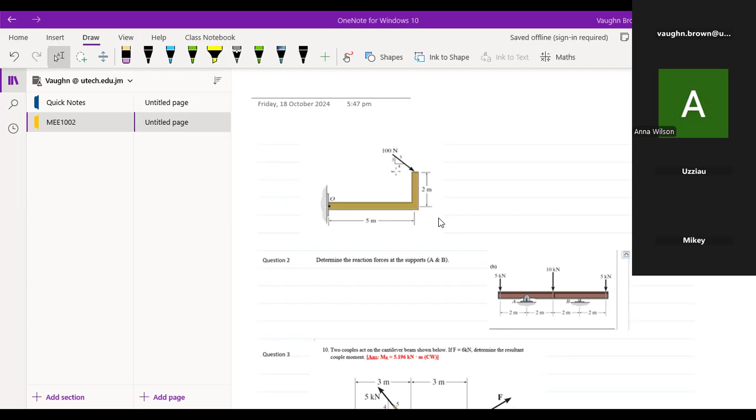So let me just use my pen. All right, so we are typically looking at these figures. I don't think I'll be able to move them, I just have to copy them, because the only other way is to grab them from your original file on this device. Let's see if it's on this device, because I had to switch between laptops. So as a result, I'm doing a little backpedaling here.

So you had some questions from this sheet here, both of them. They would have been from... no, I don't think this one. Not this one, it would have been more from the other one. This one... no, it's not this one. Oh, it's not this unit, sorry. Let me go to the unit.

I want to pull back the question, I want to have them live from the section. I think this is the section, so I'm gonna open both of these and pull the actual question back again, because the fact that I had to switch between devices, I can't move those questions. I can see them, but I can't move them as I want. So let's work with this, we'll put it there, it's a little bit better for that.

So that you can see that properly. Are you guys seeing what I'm doing? Hello? Can somebody talk to me? When I work this one again... Not really, sir. You can see what I'm doing, right? Not really. Hold on, it's paused. Hold on, all right.

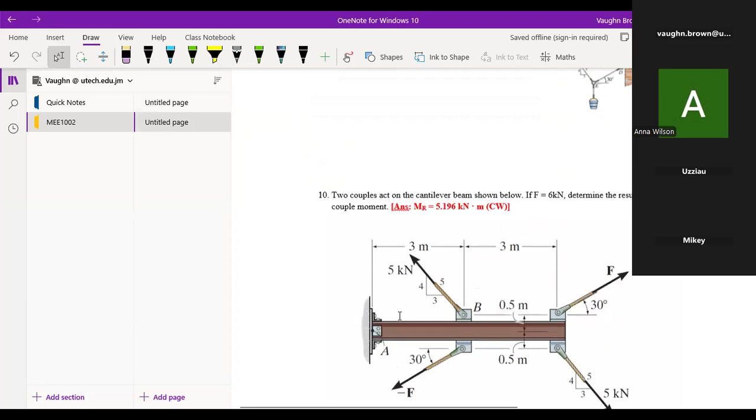I'm just putting back the questions up properly. I have them, but some of them, one or two might be a little bit faded, so I was trying to... all right, let me reshare, make sure that you guys can see.

All right, where am I? I think I'm over here. Don't try to.

Can you see that I'm on a page here in OneNote? Yes, sir, yes sir. Good, yeah, I'm on a page in OneNote. And what I'm doing, I was trying to just bring these up so that you can actually see them properly, because I had to switch devices. So this one here, I can see, but it's faint.

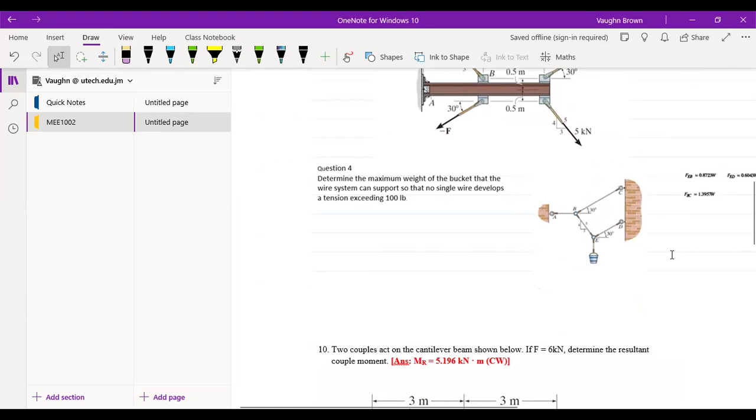That one might be a challenge, I might have to use this as this. Let's copy it and bring it up, I'm gonna carry it down, and then I'll move them around while I'm working. I'll try and create some space.

All right, I might do this one first, all right, and then or this one. I'll do this one last. All right, and I have this other one here, number 2.

That's the order I'd set them up on the other device. But this question I may have to find, I think I have it open, let me see if I can pick it up. I have it open on another... some else.

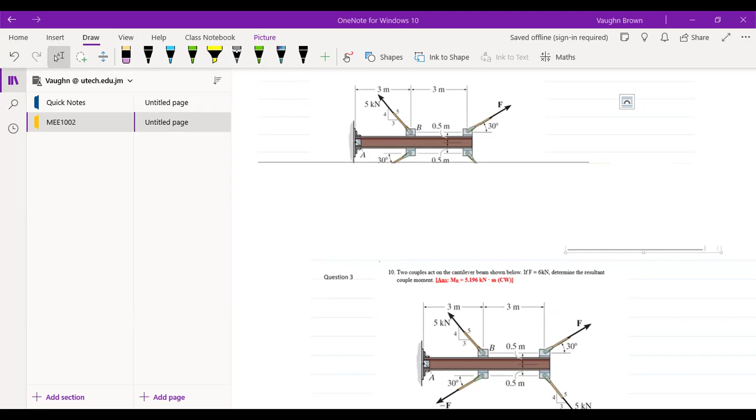All right, are you seeing it? OneNote before I start. So what I'm gonna do, I'm gonna review the unit that you guys would have been given in class. This one here, are you seeing what I'm scrolling here in Word? This is the tutorial sheet. Are you seeing everything? Oh, let me stop sharing.

I'm gonna do it another way, I'm gonna share everything, I'm gonna share everything, so anything that I'm doing, sir, you are seeing it. All right, so I'm all right, I just want to make sure that you're seeing it. So this one, I'm gonna work this one also.

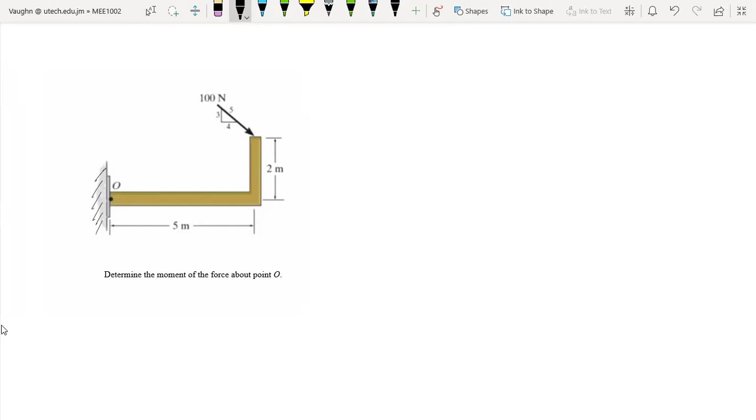So this one says determine the moment of the force. You have a frame, guys, it is pinned there like a piece of metal bolted on a wall. What we have along here is, right there, like a rivet, it's pinned to the wall. They want you to determine the moment of the force about point O. So all of the force here, we're going to just review.

Firstly, when you see the 4, 3, 5 triangle, what it means is this right angle, this is 5, this is 4, this is 3. And they're saying if you notice the direction of the force is down here, so you're going this way. And then you're coming down in the vertical, and then you're going positive - so negative in the vertical, positive in the X.

Now you can do this 2 ways. Some people might be comfortable calling it theta. You call it theta, you could say then that sine theta is equal to 3/5. Why do I know that? Because this angle is pointing to that side. Now this side, down here in the X, is an adjacent side to the angle. One side is adjacent, one side is opposite. So this is opposite. That's all I got.

And then now cos theta would be equals to 4 upon 5.

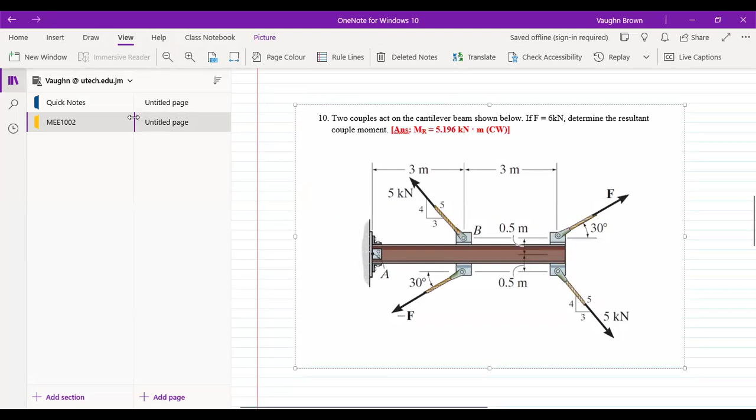So does the line help or is it confusing, which one do you prefer? Sir, everything all right? Okay, all right, fine. I was hoping to have it spread a little wider so I could write it, but it's no sir. When we have a problem with this, sir, we just say to you. Okay, all right, wonderful, beautiful.

So that now is the angles, how you find those ratios. As a result of that, we are able now to look and say let's find the component in the x. So the x component, right, for the 100 force which is acting this way, 100 Newton. It's going to be 100 cos for the x, it is 100 cos theta.

So you could write that now as 100, and the cos theta is what, 4 upon 5. So you put that, and that gives us how much is that now? 160.

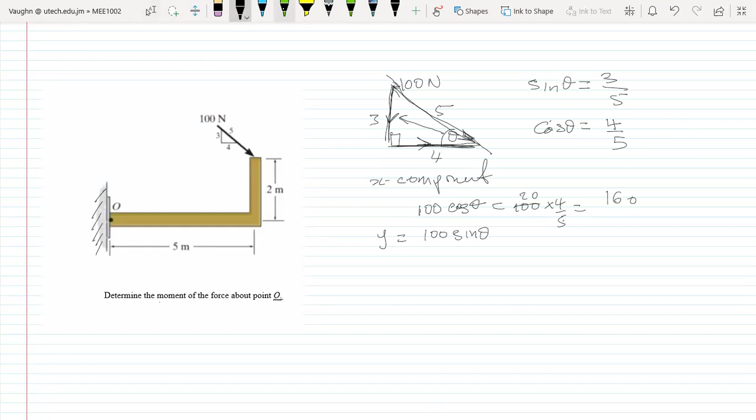What else do we have now? The y component. So the y component is going to be 100 sine theta. And if we could color them, so we have one going that direction, one coming down.

How did he get 160? 5 into 100, how much we got? 20 times 4, is that correct? Shouldn't it be 80? Sorry, yeah, I'm going a little bit fast. Hold on, where's my writer here?

All right, and then the other one works out to be 100 times sine theta, which is 3 upon 5, right? So that now gives you 5 into this, so what is that? 20. So you have 60 there.

Now let's move on. After we have the value for these, let me clean this up. So the value we have for this going that direction, what's the value in the x again? 80 newtons, and this one coming down is 60. And if you notice carefully, I do not write any minus signs there. Why? Hang on, let me get a calculator.

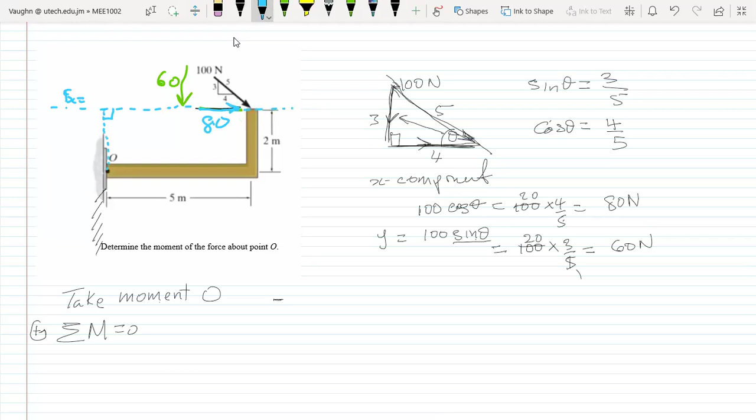And then we have the green, so you can see them differently, I'll write them in color. So for the blue, the force is going that way. Remember, you're going to turn it about this point right here. So if you turn it about that point, the force is running along here - that's the F x component running in that direction.

The distance from where it is turning is 2. So it is going that direction, all the way. Now it's going to cause a turning effect in the clockwise direction, but we're taking anti-clockwise as positive. So therefore, this force is going to be turning 80 times 2, but it is minus. Does everybody agree with that? Who doesn't see that?

Repeat that again, sir. All right, let me write it, it's too bold now, let me reduce the color and go again - just rub it under. So right here, we're going to take the point about here. So this is the distance, the distance from the force, from the point that you're turning.

So the force is what you call a sliding vector, it's going across - or some people call it transmissibility of force. It's a sliding vector, it's going across. This effect is right here, but it is going in that direction. As a result, you turn it about O, so it's coming that way. But it is 2 meters from O - can you clearly see that? So it has a right angle.

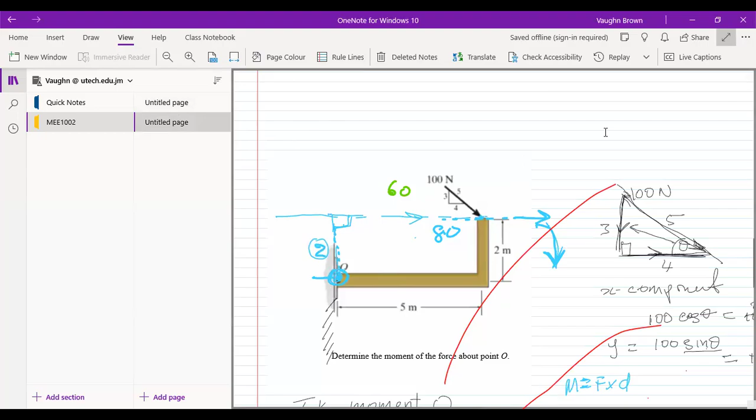So therefore, the force is going along here and it's turning around there. So it's going to be 2 times 80, which is going to be 2 times 80, give you what? 160.

All right, but hold on, we're gonna take it stage by stage. I'm gonna erase the unit beside it because I'm just gonna do the system, just like how I would normally want to work. I'm gonna leave the units out for now and put them in afterwards. So it's times 2. All right, let's clear it up.

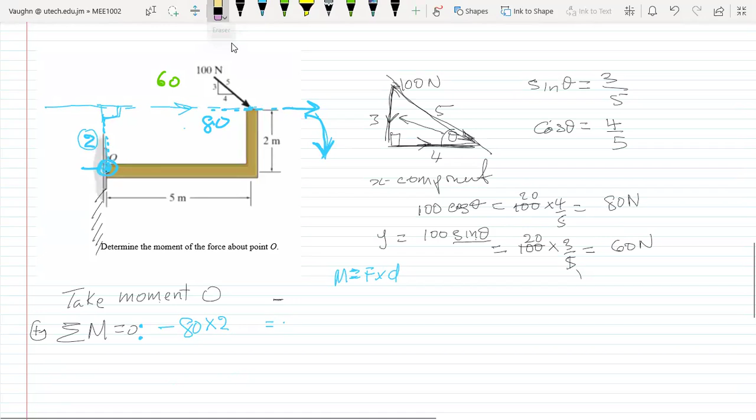All right, so that's for the clockwise turning. Now we're gonna do the anti-clockwise, and I'm gonna use a different color.

Let's use green. So for green, it is coming down. Now, so its effect — remember, essentially these forces are acting right at that tip here, but in terms of analyzing them, we draw them out here just to let you know. So they're essentially right here, and the blue is right here. They are both right here essentially, but we just put them outside there to show you. I could even put the blue up here just to explain where it is acting.

All right, so concentrate on the one that I've drawn for clarity. So we're using green, right? So it's coming through here, coming through here, coming down. You agree with me now? But you see where it's acting through?

Okay, so it's coming through, but you want to take the moment from... let me erase the blue now and use a different color.

I erased all of them. So it's really turning around here for the green. But what is it? What is the moment arm now? So you have force coming down, straight down, and then you have the distance. It is this distance to the force. It makes a right angle right here coming down. Anybody need clarification?

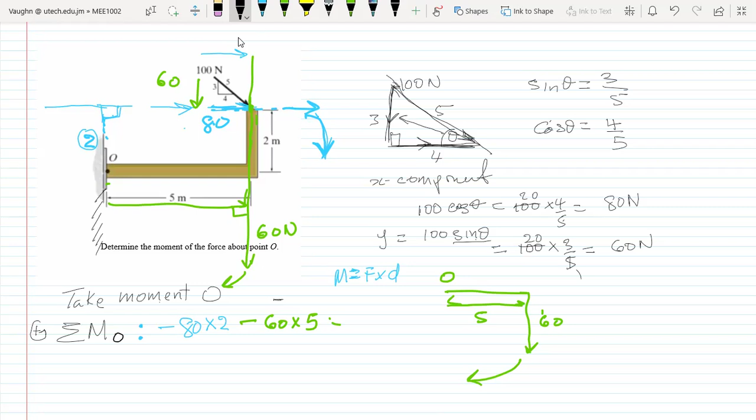Sir, I understand you get a 5 then, sir, if your perpendicular distance, you know, because of O, from O, bro. The perpendicular distance, see the 5 here coming out to where the force is acting. The force is acting from this point here, right here. You get what I'm saying?

Yes, sir. So it's acting clockwise, so this is the force, the distance coming acting across here, this distance here. That is the distance to where the force is. So you have to find, you always look for a distance to where the force is before you take the moment.

So each force, and this is important, because when you go to the next topic that I'm going to do, frames, it's important you know how to take moment. These are basically easy. So we look from where we're taking the moment. What is moment? Force times perpendicular distance.

Let me rewrite this one here. It's force, and we symbolize it, and it must go up. Perpendicular distance, alright, that is a symbol meaning perpendicular distance. So this perfectly maps out the perpendicular arm right here. So you have the distance from O and it forms... based on that, right?

Based on that, you have 5 times 60. Alright, what does that work out to? Let's work it out. So we have it now: 80 times... we have 80 times what, 2? That was the first one. Yeah, 160, plus minus 300, 160 minus 300. And that value gives you, how much is that?

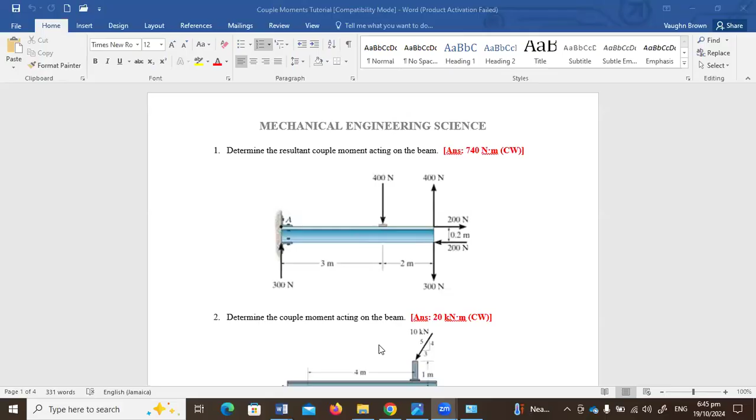Okay, beautiful, ready. Hold on, I need to get rid of it. I'm not seeing it because I'm in like a blackboard mode. Let me see here. Oh, it tells me to keep going. Just indicate to me when... alright. But I'm not seeing my Zoom in there. Right, alright, okay, getting back to OneNote. Where's my OneNote? It disappeared. Am I not still sharing? My OneNote page has gone, where is it? I'm in OneNote. Let's see if I get that page. Alright, so here we're back. Automatically, I'm not taking up and keeping the Zoom, waiting for it to report together.

All right, you'll have to tell me because I'm not going to see them on there. All right, so that's pretty much finished with that part.

All right, so we have taken a moment about O, for that. Once we have worked out the forces correctly, the only way it's incorrect is if we didn't work out the forces correctly. All right, just double check all the calculations that we have done.

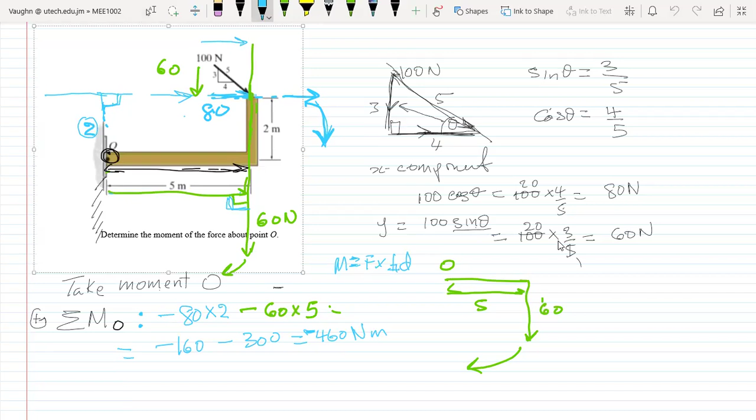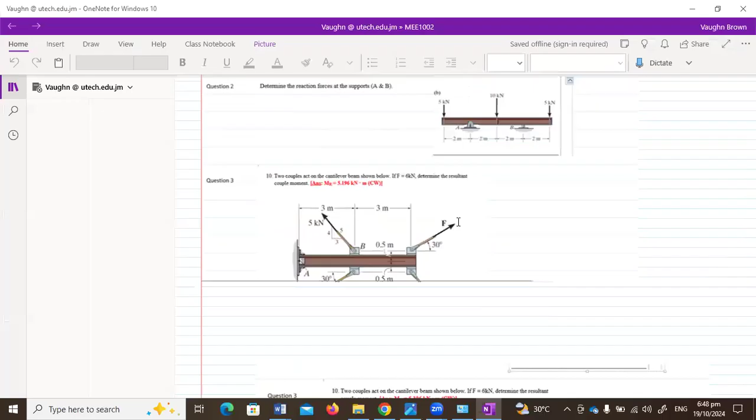Next one, we're gonna come to more. Let's see which one I should do. I'm going to do this one here. I'm gonna look for it because I want to get the right picture of it. That was in the moment file. Let's go into the moment file and take it out. So the moment tutorial, I think it was in this one. You're probably not seeing the page that I'm gonna open.

Look, it was probably a last question. It is, but this question says you're to do the reaction. So we're gonna take some more moments, so you're gonna get a chance to consolidate them.

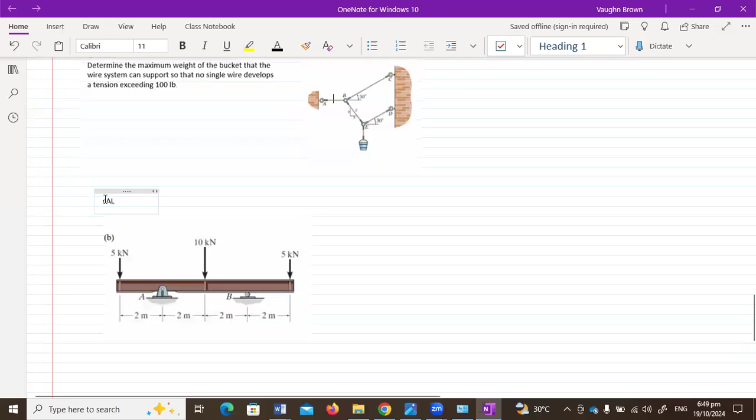All right, so we are to find the reaction at the points where you have your reaction, right? So it says here, calculate... this is what I'm writing. Calculate the reaction at A and B.

Right, okay, so therefore the first thing you must do, class, you must draw your free body diagram. Let me see if I can. The big advantage is now I cannot see my keyboard, I put the zoom up there. All right, so the first thing you need to do is draw your free body diagram. You never ever start without it.

So you do your FBD, let's get the block. You must do your FBD, and your FBD means that you must draw a straight line. That's not the line with a little bit, we need a straight line. All right, good.

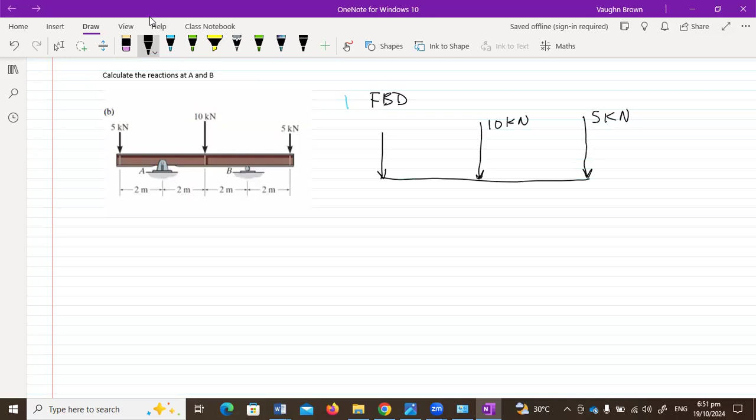We have one here, we have one in the center, somewhere in the center, midspan. We call that midspan, at the midspan of your beam, right in the center, we call it midspan. That midspan is 10 kilonewton, and this is 5 kilonewton, and here is 5 kilonewton.

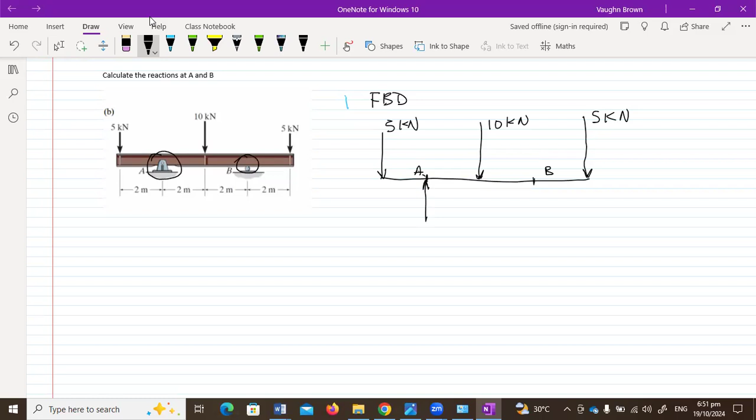All right, now at the middle of this is A, middle of this is B. And remember now, right here is a pin joint. Are you seeing? Here's a roller. So here, when you're doing frames, we'll recognize in frame we'll consider 2 forces here. But for all intent and purpose, what we are doing, we're just gonna do the vertical forces alone. But these examples, just the vertical forces. When you're doing frames, for pin joints, it's going to be a force going that way and one going the other way.

For now, I'm just going to use this one alone for these types of reactions we're finding. That means we're ignoring the horizontal force, so we're concentrating only on the vertical forces. Everybody understand what I'm saying?

Later on, down for these problems, when you see a roller, it means one force at that point. Pin joint, two forces, but that's for later. I'm telling you now because you need to know it.

So right along here is that beam, right? It wants you to do the reactions.

The very first thing we're going to use is the equilibrium equations. Two equations are going to be important here. You have three equilibrium equations, but we're not going to use one of them in this problem. We're only going to use sum of F of y equal to 0, and sum of moments around any point, whether we use A or B. I choose the right way. So I'm going to use these two right now to solve that problem.

So let us start with F of y. The convention I'm going to use is up as positive for the sum of forces, so we write that properly. Positive for vertical y, upwards positive, downwards negative. Use that as a convention. I see in some slides they're switching it around, but don't do that. Stick to one thing until you understand it fully.

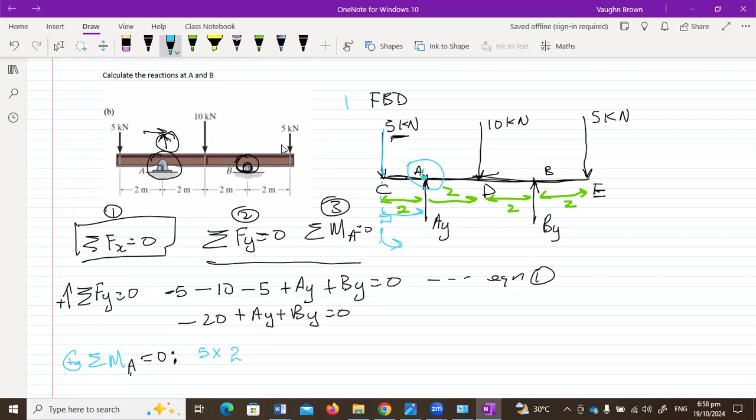Anybody have any problem with that one? All right, let me move this up a little bit more so I can see. So that's the first one. Now, AY is not in the problem because that's where we're taking the moment.

We're going to move to the 10 kilonewton force. The 10 kilonewton force is coming down through here, and its distance from A is what? 2. Can you see that? So it's going to be turning the body in the clockwise direction, which is minus 10 times 2.

Nobody see that? Who doesn't see that? If you're not seeing it and you stay quiet, I can't help you. All right, so we're moving on. Everybody understand? All right, so moving on.

Excuse me, I was having problems turning on my mic. But why is it 10 times 2 and not 4? Because you're taking it from A. What's the distance from A to where that force is? 2. Yes. But isn't it like you completely ignore the fact that A was there and just take it? No, we are taking it about A.

Remember, look at what I write over here. We write out what we're taking the moment about, because you need to tell me that when you're taking a moment, you need to indicate what you're doing. So I write out what it is that I am doing so you can understand. You see that in green? That is what I do. That tells me where I'm taking my moment, so I can understand. So from that notation, you should understand that you're taking the moment about that point.

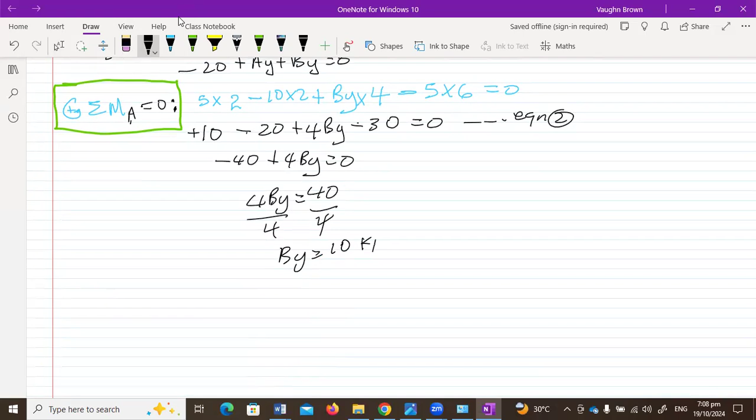Can you see that this zoom link is shadowing me? Can't see, we're here. Yeah, go back down now, sir. Let me screenshot the last part.

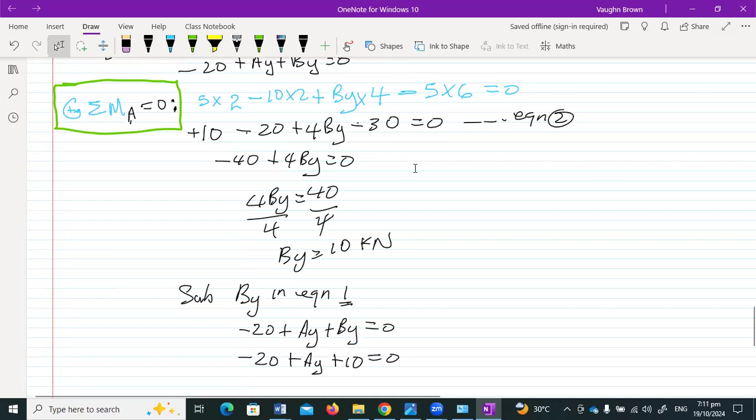0. And you're just simply going to transpose. So it's going to be ay, and it equals to, this becomes minus 10, this comes over as plus 20. So that value, only 10. Right? So you see that comes over as minus.

Remember, you were taught the simple equations. You didn't know you were going to use them, eh? So you're using them now. Because students normally challenge me a lot about stuff that I teach them that they never use. But see, you use stuff from basics. So we're scaffolding you by just the theory right here. Right? So you're using it to transform you from one level to the other. Scaffold you. All right, all right.

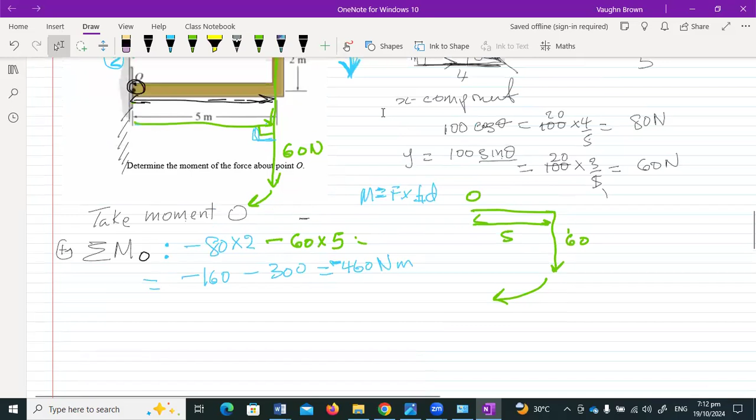So let's move on right there. So that's, you have the solution. So that's 2 problems that we have done. We have 2 more to go. I am going to take this problem here first.

I don't have a bigger picture of it. I'd have to go and search for it. I don't have the time for it. No, I'm just gonna expand this one. Let's put it somewhere here. Let's see if I can expand it. It's looking shady, I hope I can read the value.

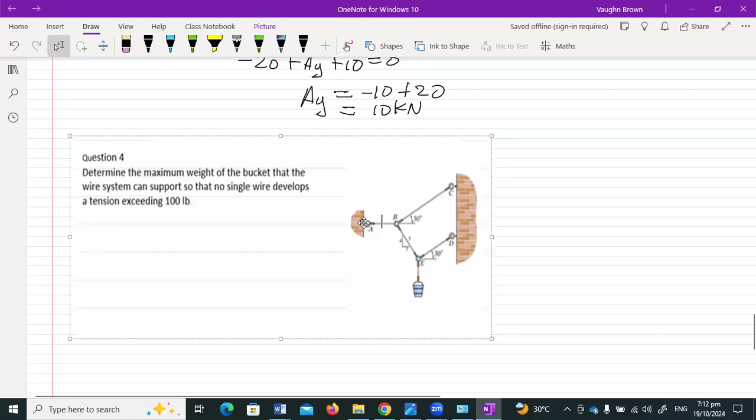All right, I've changed the value a little bit from the one that I have on the test. Why? Because just in case I have to open up the test, you know, I changed the value. So I'm using 100 pound. The one you have is 50.

All right, so here now you have a problem. It says A, B, C, and you have D, E. Now, the first thing you need to do, and this comes from the equilibrium section that we have done for forces, right? So the first thing you need to do, you need to draw your FBD. What is your FBD, please? Can somebody tell me?

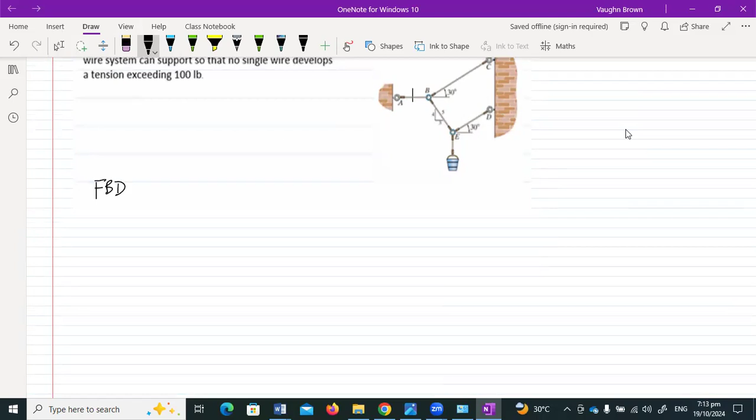What is your FBD? Free body diagram, sir. Right, free body diagram. So you're gonna draw your free body diagram. So we're gonna come and we're gonna go that way, I hope I draw it right. And then it comes down that. So we're gonna draw my FBD and label it, so we know what we're doing. So this is D, and I'm taking off the section with E first.

So I'm gonna resolve forces about E. And this point would have been B, right? And then, so I'm gonna consider that my force is here, my force is going that way. So you could choose to call it whatever you want to call it. Some people probably call it TBE or EB, since it is going up, we could call it that here. We could label it TEB. Now this one could be called TED, right?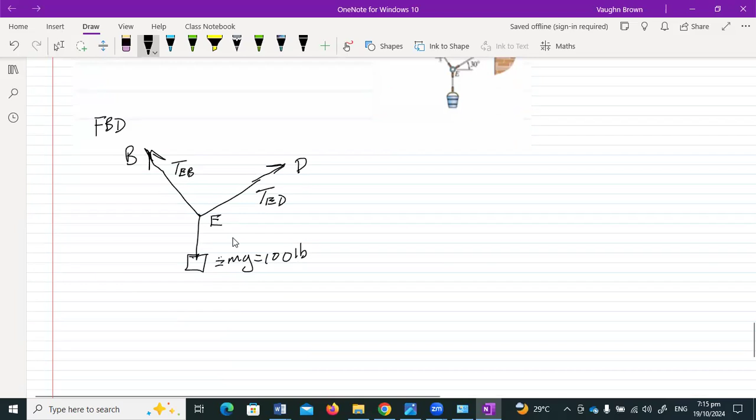It says determine the maximum weight of the bucket that the wire system can support so that no single wire develops a tension exceeding that. So that's what it is. All right, what are the angles now? Let's put those in because those are crucial. We haven't done that.

So we are solving the tension in TEB and TED. We already know this one. This one is 100 going down.

We need to draw where the horizontal is, and where the vertical is coming from. So this is your Y, this is your X. So what have they given you? They said that this is 30, and they tell you that this is a 3-4-5 triangle over here. So this is 4, 3, 5.

What are those angles? Same thing like we did before. If you want to call it alpha, this is 4, this is 3, this is 5. Sine alpha is going to be 4 over 5. I'm calling it alpha, and it equals 4/5. All right, so we have those. We're just going to work with the ratios.

We could work out the angles too, you know guys. I know one is 30 something and one is 53 something, but we could choose to work out the angle here and use the angle if you want to do it that way, let me show you. Find one of them for me, any one of them is going to be the same value. So sine of, let me just show you the two ways.

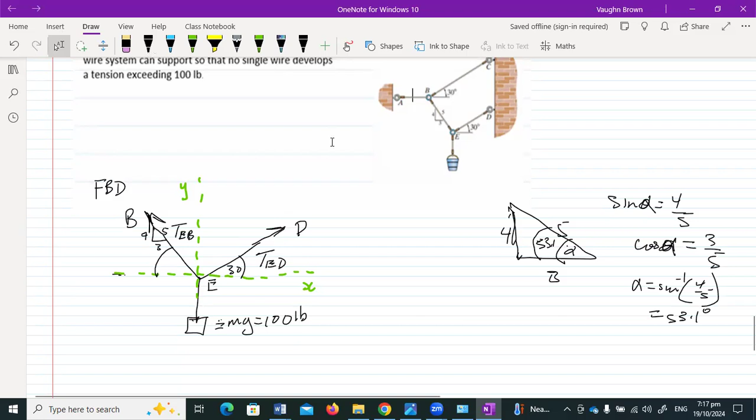Sir, why didn't we use the weight in the 3-4-5 triangle? You can't use the weight in the 3-4-5 triangle. It's only giving you a direction for the tension in TEB, that's all it's doing. Okay, all right sir, yeah man. All it's doing is giving you that. So therefore, we know that this angle is 53.

For those persons who are not comfortable using the ratio, I'm just showing you two ways. So now that I have the angle, I can just work with the angle straight. All right, so I have angle over here, angle over there. If you're comfortable with that, do that.

All right, so let's write them now. Sum up the forces in the y equal to 0, and you're taking y as positive going up. All right, so if you look for your forces in your y, what are the components you have?

A component going up in that way, all right, and you have one, so one coming this way, let's do it in blue. Two of them, one coming that way and one going up that way, can you see that? One going that way and one going there. Likewise, over here, one coming that way and one going that way.

All right, so we need to identify the horizontal and vertical component, but we're gonna do the horizontal one time. So let's write them, I'm gonna write it in black. So for the vertical components, it's going to be for the TEB, so it's T E B, and the force going up is what? Sine theta, right? So we know the value of theta, let's put it in. So it's sine of, what's the value there? 53.1, and it's positive. Do you agree with that? That's for the Y, oh that's the one in blue.

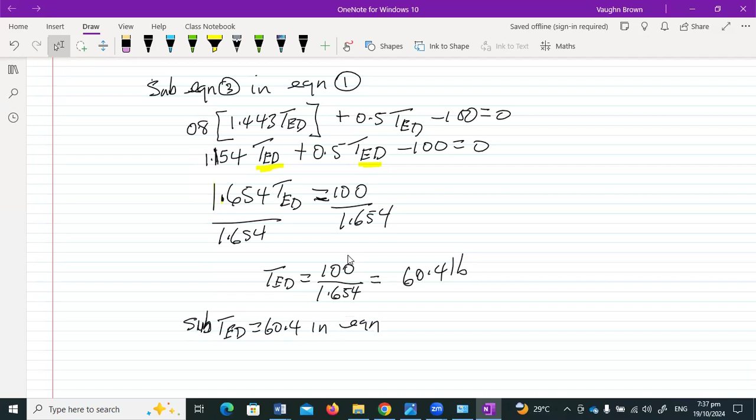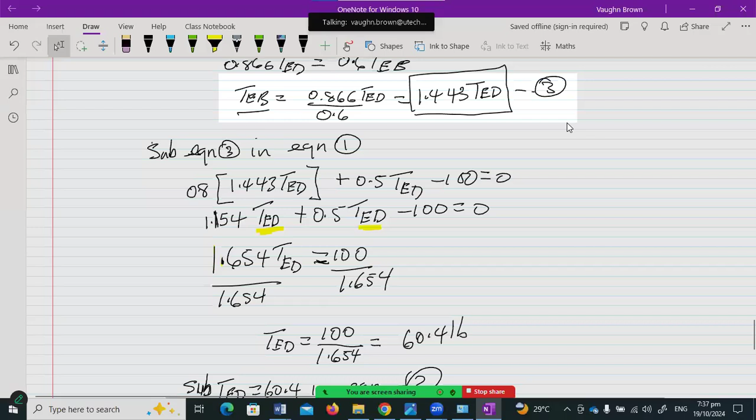So I put that in. Now that you have the 60 pound, you can substitute. You're going to substitute TED equal to 60.4 back into equation 3, because remember, you formulated equation 3. So equation 3 said... let me copy this down. When I bring equation 3 down, this is a good way to do it. So here we have it, that's equation 3, and we're going to substitute TED in.

It's simplified, and TEB is equal to 1.443 TED. So in that case, TEB is equal to 1.443 times, and you drop that in, which is 60.4. So what that gives you, multiply that by 1.443. Guys, you can help me work here, it'll smooth out the process so I don't have to go to the calculator every time. I'll take your answer if I can hear 2 or 3 people telling me the answer.

87.17. 87.22, I got, because I'm using some decimal points. How much did you get? I'm using extra decimal points to make sure the answer is more accurate. Sir, I got 87.15. No, 87.16, maybe you didn't use extra decimal points. So that's why my answer is that.

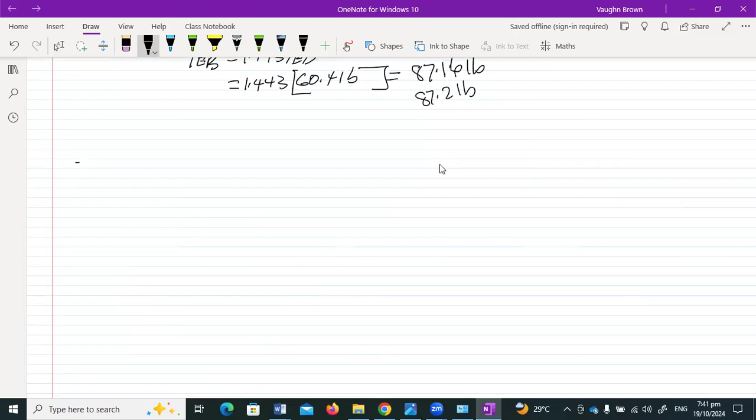The next part is we're going to go again. So we have done that section. We need to do, let's bring this down. We're going to pop it down. Let's bring it down. Sir, before we move on, right?

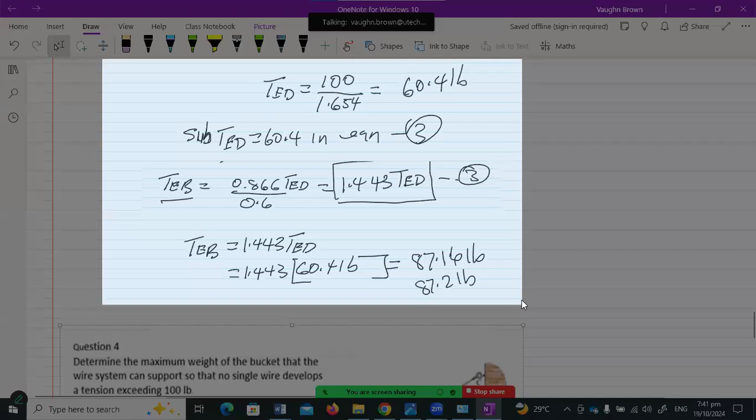I understand everything, right, but you drew the free body diagram, you don't understand the free body diagram? No, I understood everything you did, but the free body diagram that you did only has TEB and TED, right? What about the other rope at the top, the string at the top there? Why do we ignore that? Which rope, BC? We're taking it phase by phase, we're not ignoring them, we're just taking phase 1, phase 2. Cool, so part 2 now.

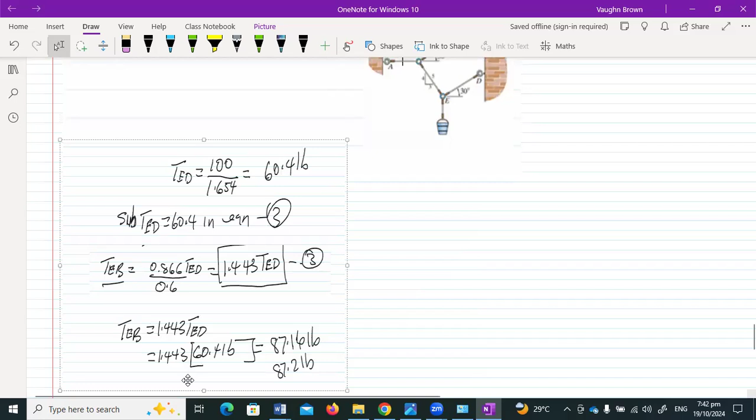I brought the solution here. Probably I should make it a little bit smaller because it's in my way. Hang on, I'm trying to... so this is my favorite page to work with. Over the years I've used this page, and I find it very useful, so I don't bother with anything else.

All right, so now we need to draw back a free body. We saw part 2 of the problem, and then we need to go and draw a free body diagram again for part 2.

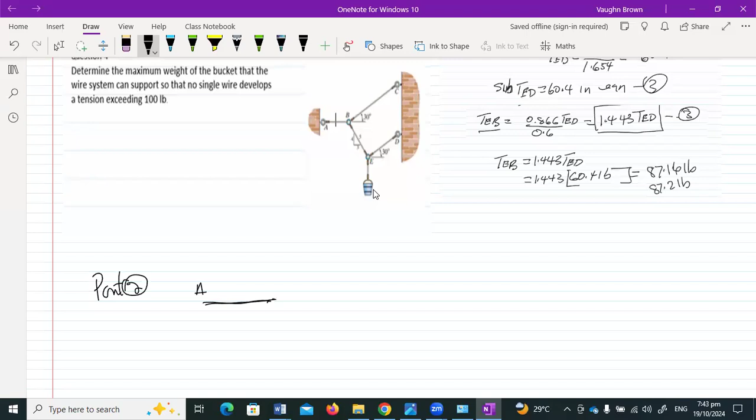So here we go. So we have a part goes straight, right? This is A, this is B. Then we have another part goes up to C, and then you have another one going up, right here.

Some person's internet seems to be very unstable.

All right, so this part was what? E, right? Now the fact of the matter is we worked out some already. We have that already, and we have that.

So we have pretty much some angles here. We had worked out some already. We know that this is, let's put them in. That's 30. We had worked out EB. You remember we had worked out EB? What was EB? Let's show it up here.

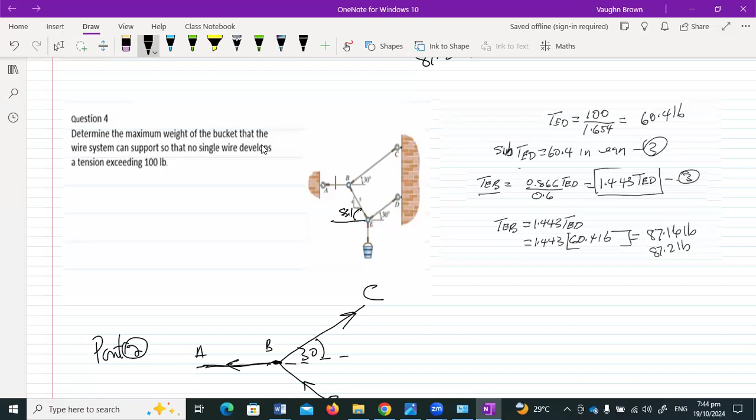EB was 53.1 down here. Let's draw it in where it was. So right along here, down here was, this angle was 53.1. Everybody remember that? That's important to me. So I have this angle down here.

I'm putting them in the direction that I have them labeled. And this is T, B, A. So it's any direction I choose the force going, that's the direction. This is the rigid body. That's the direction that I'm putting it, and labeling as consistent as possible.

And this is important, so therefore this angle here is 53. I'm writing a different color for clarity. This angle here is also 53.1, right here, to the horizontal.

Can you see that? So right here now you can see how alternate angle comes in. Is that diagram too small? You want it bigger? Let me make it a little bit bigger. I'll have to do some adjustments. Let's get it a little bit bigger.

All right, so here's the angle there. That angle is 53. So this is T, E, B, right? And the arrow is going up. All right, so there we have it.

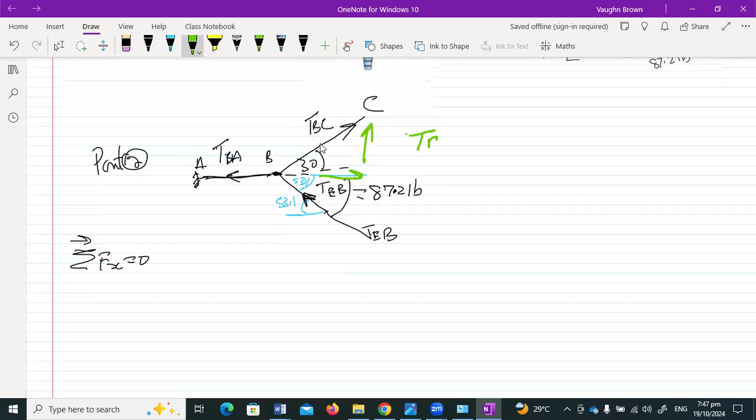All right, the first thing we need to do is reckon what's our component of our forces. So we have for TBC, we have some forces here. So this is T, the first one is TBC for the vertical, sine 30, that's what I'm going to. The horizontal one, so that is our Y component. For the X it's going to be TBC cos 30. And you notice I'm not putting any sign, I'm just telling you what they are. All right, so that is important.

And we already know TEB, we can find that one. You have one coming down. Let's write those so we can just work with them smoothly. We have one coming down, and we also have one going that way. Let me do it with a different color.

Sir, when you say work it out in phases, you mean just choose two strings at a time and then?

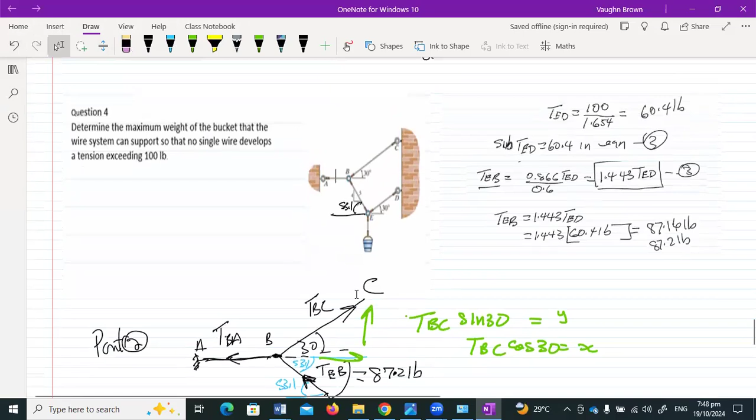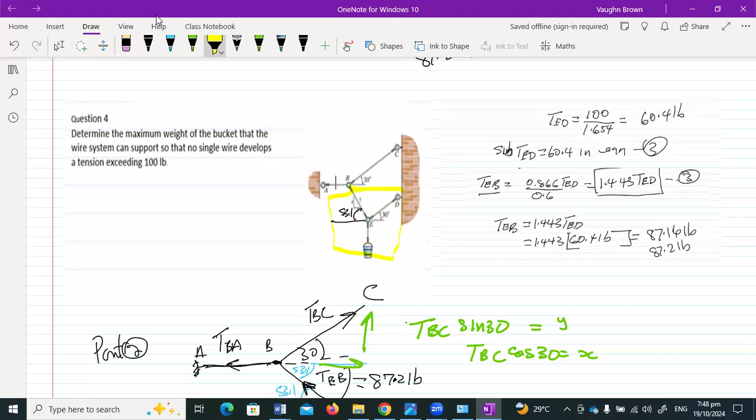Well, it's three. Let me go back again. Let's scroll up onto it. When you say in phases, all I'm saying is we're gonna take one segment and work it first. And then when you finish, you know that the BE string is going to be interlocking to the second phase with a value. It's going to interlock there, so you have to consider it. So yeah, you're taking a section first, and then you're doing the very same thing.

So let's find the component of EB again. One is coming down, and one is going that way. So they are both negative components. Let's find them, let's write them now. So one is TEB for the X, is going to be what? Cos 53.1.

For the Y, TEB sine 53.1. Those are the components that we are working with. All right, so again.

Sir, for TEB you put the force up, but then you're saying it's going down and left. What is still going down and left? What did we assume up here? What did we assume when we're doing this part? Did we assume that it's going up here? We keep the same assumption. The force is going up. Whatever assumption you made in the last part, you have to keep it.

But sir, you're saying down the bottom that it's going down now. Did I change the position? Yes sir, he's right, he's right. That TEB here in this equation is going down.

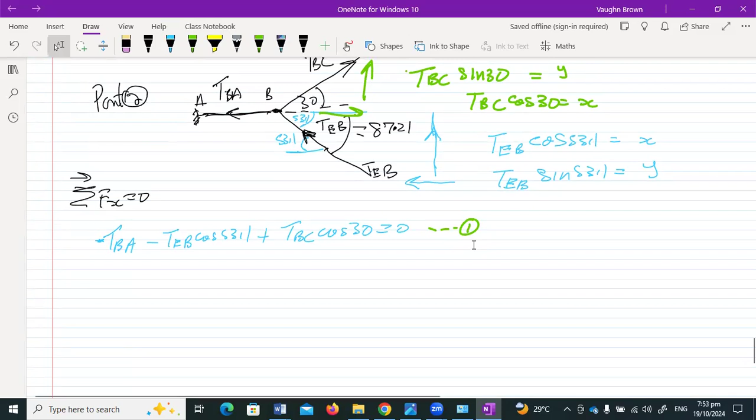And then equation 2 now. Let's write equation 2, let's bring that down a little bit more so you can all see. I'm gonna write it in green - all right, I hope you can see it. I prefer black, but because I want to kind of... all right, I'm gonna write it black, I like it, black is better, probably hurting your eyes otherwise.

So therefore we're gonna do equation 2 now, and we're gonna sum all of the forces in the y equal to 0. All right, so let's start. So we have one going, this TBC sine 30. All right, and we have another one going up, which is going to be plus TEB.

What did I tell you happens? That's sine again. Sine 53.1. Am I correct here? Let me just check that. Yeah, so that's a sine. All right, everybody see those forces?

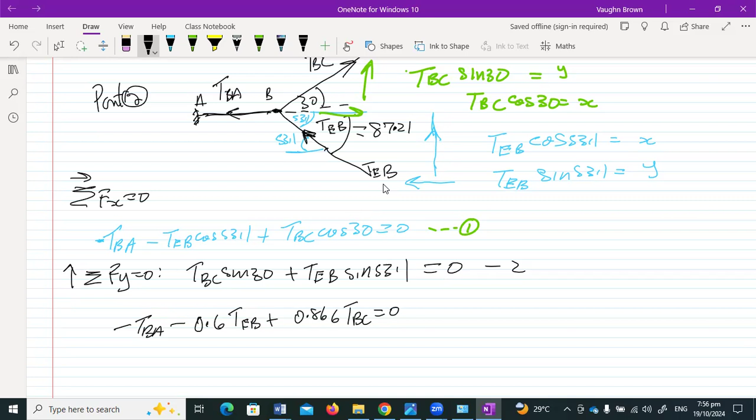All right, I'm not going to the calculator, you guys gonna do it. So we have 3 unknowns in equation 1, you recognize that? So simplifying equation 1. This is EQ1 and this is EQ2. All right, next one, so we're gonna work with equation 2.

Let's simplify this. So equation 2 now simplifies to 0.5 TBC plus sine 53.1. How much is that? Sine 53.1 is 0.79. Have any more decimal points? Well it's basically 0.8 actually if you round it properly.

Because that's sine 53.1, yes sir, it's actually 0.8 if you round it all. Right, 0.8, let's call it 0.8. Where's my writers? Come.

And this is TEB equal to 0. So now this is equation 2, of course. This is 1 or 2? This is 2, so this is equation 2. Now we're going to write equation 3 because we're going to transpose one of the equations for the other.

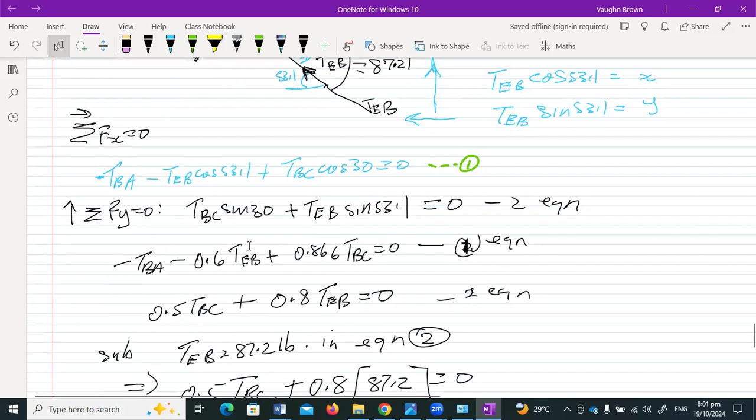All right, and then you're just going to simply now, so you have two of the unknowns, so you're just going to drop it in and find the last one. So you're going to substitute. So here you go, you're going to substitute TBC minus 139.5 pounds and TEB 87.2 pounds in equation 1. All right, so let's bring equation 1 down.

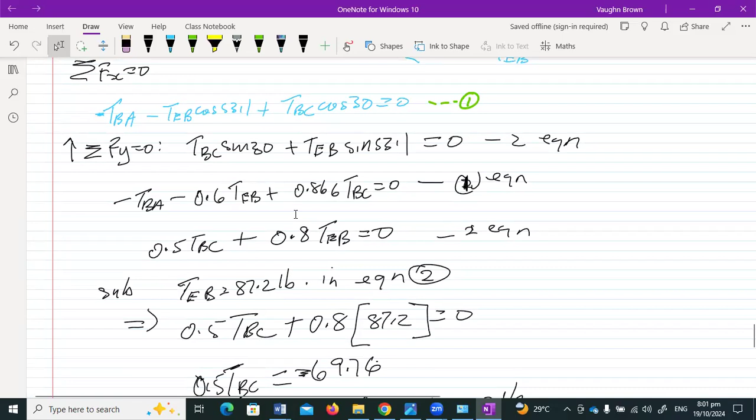All right, I'm just gonna bring them down for simplicity. Let's drop it, I'm gonna bring them, drop them right here. So we have our expression right here. Good, so we're just gonna substitute.

So the only thing that we don't know is TBA. Minus TBA minus 0.6 times TEB, 87.2, plus 0.866 minus 139.5 equal to 0. All right, so we need to just solve for TBA.

Not true, so can somebody multiply out this summing? 0.6 times 87.2. 52.32. All right, plus next one.

This one is gonna be a minus though, let me just correct that. 0.866 times that value. Sir, it's 120.807.

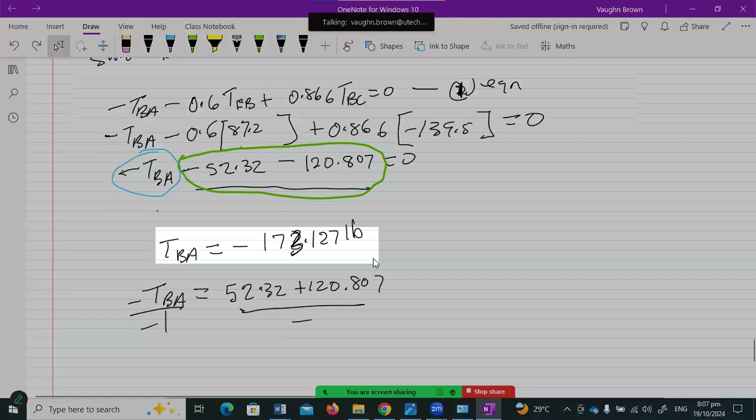Oh, it didn't move it. I want it to move it. Come on, let me know. I'm gonna take a 5 minute break because we have one more question to do. I want it to move it. Is it giving me an option? No, not giving me an option. I can copy it, there's a copy, but it's not moving. I can erase it.

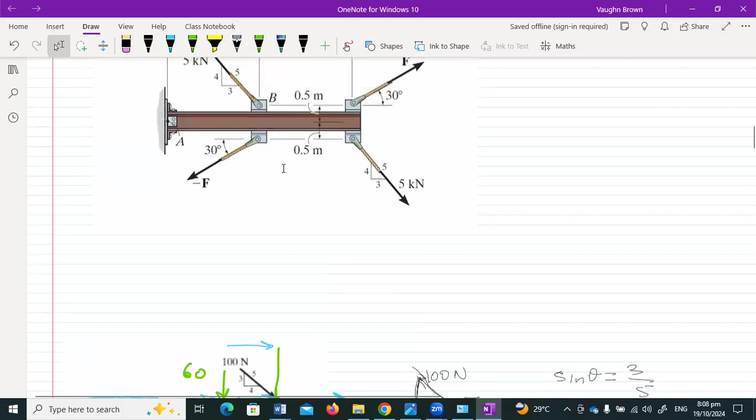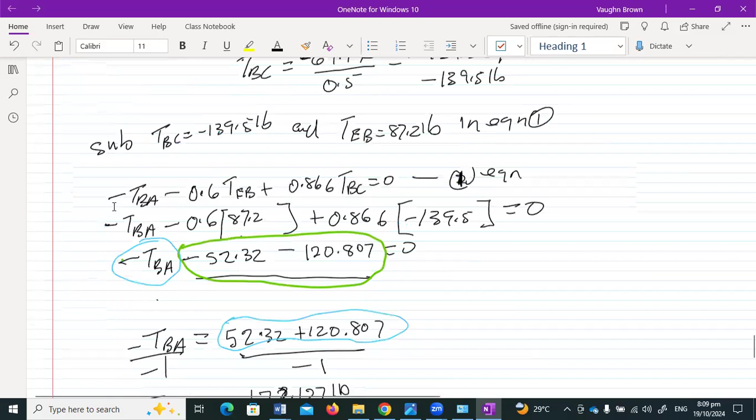So I've done those, and then we are doing this guy. I have this guy to do. I'm gonna take this guy down the bottom here, cutting, dropping all the way down. This is the one that we're doing. You guys can start working.

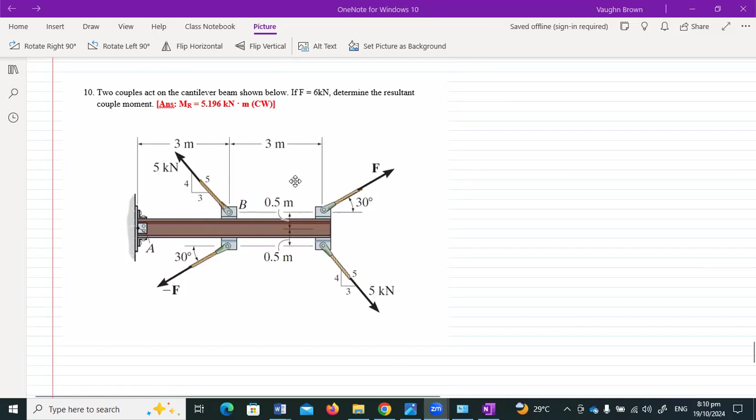So this is the last problem. All we need to do, everybody, work out the components first, so when I come back, you can easily tell me how to solve this problem. It says two couples act on the cantilever beam shown. If F is equal to 6, determine the resultant couple. There is also a resultant couple here, so both of them, resultant couple. What I suggest, work them out into components first and just get the resultant couple.

So this is not hard, we just need to do two sides. We know F is equal to 6 already, and then 1 is 5. So this is not hard, we should finish within 15 minutes. 2 steps and we finish this problem.

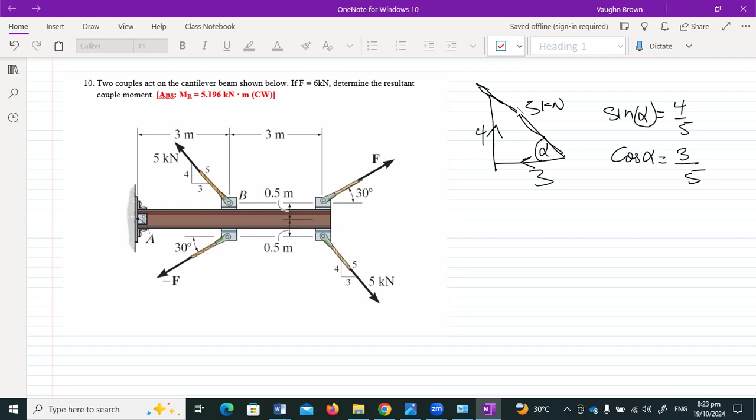But let's work it out for clarity. So sine alpha equals 4 over 5, and the angle, and cos alpha equals 3 over 5. So that's what we know. You could choose to work out the angle, or just use the ratio. It's easier to use the ratio. But let us do it the long way, so we know that.

For a couple, all you need to know is one, the distance between the two forces. So let's draw this. One is going up, in green, positive, and one is going negative for that one. But for this one, let's look for that. The other one in blue is coming, one is coming down, and one is coming that way. Do you agree with that?

That's for that one. For the other one, F, which equals 6 kilonewtons, one is going up, right? Let's take that out in a different color. So this is 6 kilonewton, one is going that way, one is going out, right? Same thing with this one. But remember, you don't have to do both forces.

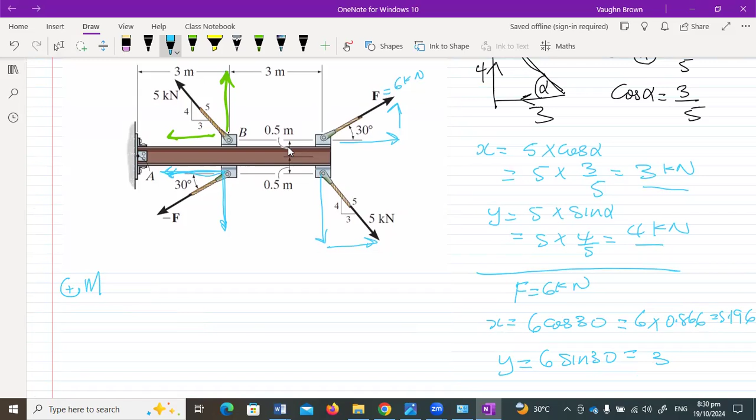So you have, if you notice, before we start analyzing it, there's two 5 kN forces. And remember, the coupling between it will be equal to the distance between the two forces.

So the distance between the 5 kilo vertical components is what? That's 3. So if you notice, let me see if I can illuminate it. This is 3. Between these points is 3. Do you agree with that? Between this point and here is 3. All right, that's the force we're concentrating on.

And then for the other one, can I get a different color? You're getting the distance between this one and here. The distance is 1. The distance here is between here and that distance there. It's 1 between them. Whatever component you have here and the component you have, the distance between them is 1. Let's go about that part.

So the distance between the components for the vertical ones is here, so it's components here. So let's do them.

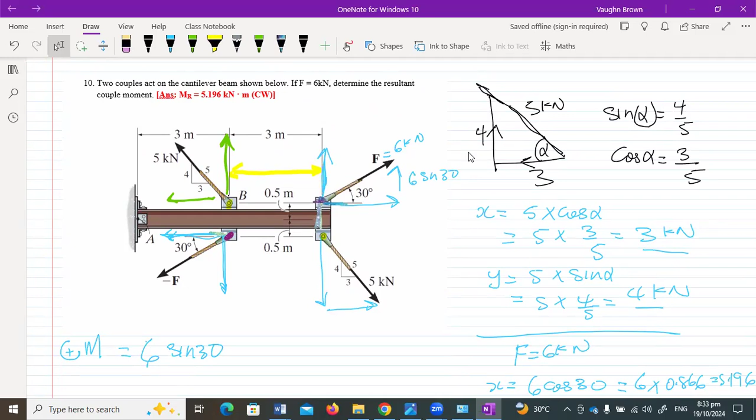And the vertical component down here is this, can you see the point? It's between these 2 points here. So it's 6. And we're taking which direction? Which direction is the body moving? So is it the distance between both of them?

One going down, one going up. What's the distance between them? 1 meter, sir. No, man, I'm talking about the vertical component of F. What's the distance between the vertical component of it? 3.

Right, so the distance between the vertical component of it is 3. And it's going to be turning the body which direction? Anti-clockwise. So therefore it is 3 and it is positive. Do you agree with that? So between this component in blue, the vertical component I marked before, this one coming down and that one going up, the distance between them is this. So that's the first one, am I right?

All right, the next one now, I am going to look at the horizontal component for that force. The horizontal component, where are they? They are in blue still.

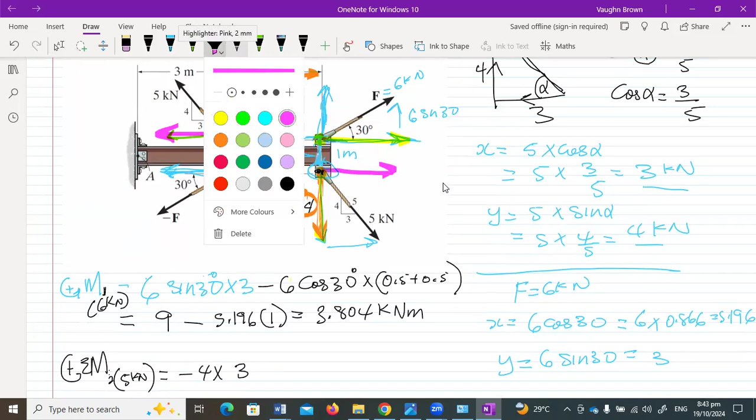All right, so what's the distance? Let me highlight the distance a bit. So the distance we're talking about is this distance. Right here. This distance here and that distance right here.

The distance is going to be 1. Do you see that? Can you see that the distance between the components is 1? Yes, sir. All right.

So therefore, if you take it from any one of them, any other point, suppose you want to choose this one that I'm marking right here, and you take the force on the other one. So if you consider the one below, let's say you're taking the point about where it's anchored for the other force.

So the other force is going to be turning the body clockwise. Do you agree? This one is going to turn the body this way. You agree? So that force about 1, and the gap between them is 1. You agree? So the moment arm here is 1.

And this is the force. So the force comes tapping and coming through this point, and it's turning about this point here. And it's turning about that point, and you're turning the one up top here about that point. So it will give you what now?

So what was that force value again? Can somebody remind me what that was? The horizontal one was 5.196. 5.196 times 1. So it's 5.196 times 1.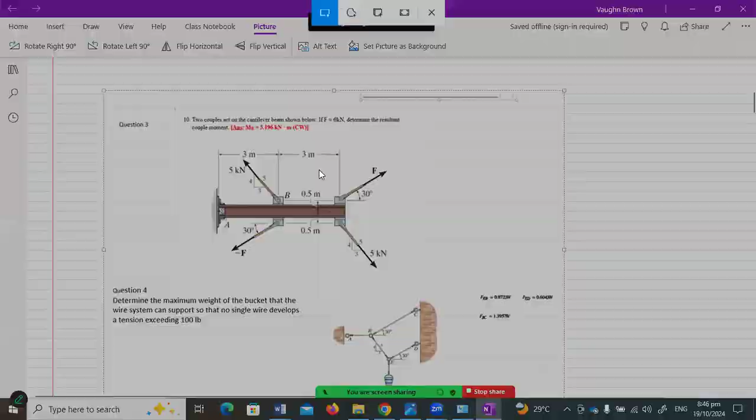But once you see you have two forces, let me see, can I pick up the original diagram? I don't want to mess with that. Did I copy it or leave it somewhere? I took it, yeah, the one here. So everything is in. I'm going to take off part of this. Let's see if I can use it. All right, so let's come back down.

Let's talk about it a little bit. We're almost done. I think one more little skill to go, but I want to just explain something. All right, so bring back this picture. It might not look pretty good here, but I'm going to want to put it here because I don't want to finish up.

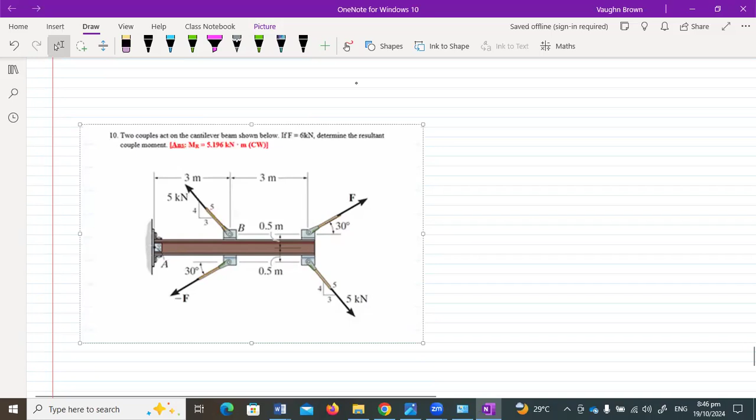All right, so what we're doing, if I could mark up this one, nice right over here. Feel back the same color. Really funny. All right, so we have the components going this way. What is this one? Force. That is 4 kilo.

And we have a component going that way for that, same 4 kilonewton. All right, the distance between this point and that point, sir, the horizontal one was 3 kilonewtons, not 4. Ah, thank you. Beautiful, beautiful.

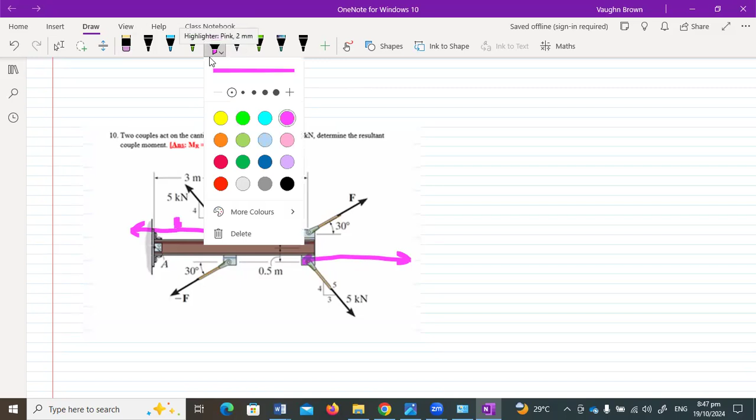Yeah, I'm tired now. You guys give me a lot of work to do. Not necessarily you guys, or it's not going to write at all. It's still fine. Let me take up one from here. I think.

Can I get a pink? Get a pink, right. So it's 3. Oh, black. I could have sworn that I changed the color. It didn't change. No, I could change that. So this is 3, it don't change. All right, guys, it won't change. Let me just erase this out. Try my best, but it's not.

So what we're saying, this is 3 kilonewtons there. There's a 3 kilonewtons there. And this is the distance right between them. Right? Let me look, that's the distance. That's 1 for them. You understand me? But that is the horizontal one.

What we do, though, when you take in the couple, right? When you take in the couple, you have to take it against one of them. It's either you're going to use B, or if I call this one C, either you put B as your center or C as your center. If I use C here as my center, I'm putting my compass point right here. Therefore, the turning effect of the x component is coming. Remember, the x component is coming along here, see there, and it comes right out here.

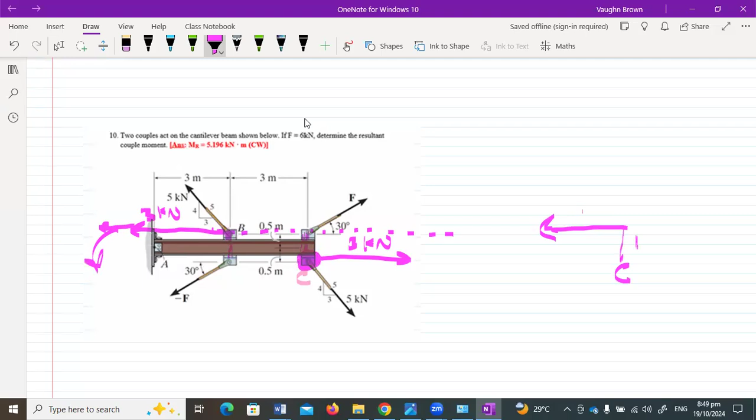C is here. Sir, wouldn't it be anti-clockwise? Pardon me? Wouldn't it be anti-clockwise? Anti-clockwise, I said. What did I say? Clockwise? Anti-clockwise. Yes, sir. Yeah, sorry. Okay, so this is 3, right? So it turns it, so that makes the right angle.

So you have to look at where the two forces are anchored and the distance that separates them. For the component that is horizontal, it's the 1 that separates the horizontal component. I would do it also for the vertical component. We do the same thing.

For the 5, we look at the one coming up, which is what, 4. And we look at the one coming down. If you choose to hold C again as your turning point, let's say C is the turning point, therefore the distance between C and where that force lies is going to be 3 for the horizontal distance. So if you hold here as your turning point, then this force is going to turn the body around here, that point. So it's going to be 4 times 3.

And that is going to be what? Clockwise. You understand now? And you do that for each one of the forces. So you do it for the F and you do it for the 5 kilo. The F, of course, is 6 kilo, which you know. So you do it for the 6 kilo and you do it separately for each component.

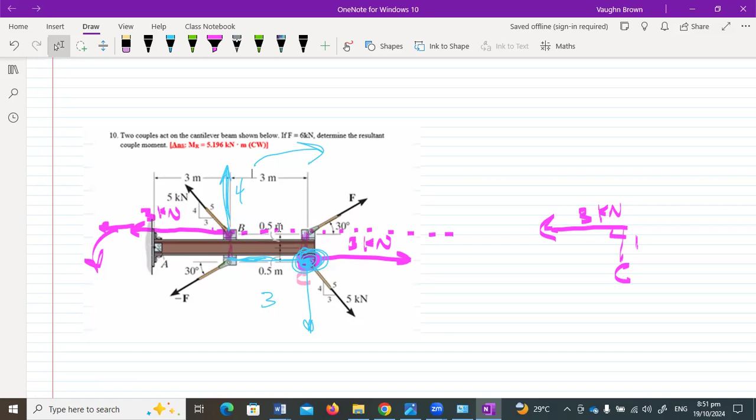You analyze them between where they are. All right? Does that explain it? Does it explain it? Was that helpful? Yes, sir. All right, yes sir. So let's go back. So this one works out to minus 12, of course, plus 3 equals to minus 9. Was it? Yeah, it was kilonewton meter.

All right, but the problem is not finished. The problem says we're to find the determine the resultant couple moment. So the resultant couple moment, you're going to sum M1 plus the sum of M2.

Right, so M1 plus M2 will give you 3.804. So this gives you essentially the couple resultant, which is really M1 plus M2. Right, so it equals to 3.804 for M1, and M2 is minus 9 kilonewton meter, right?

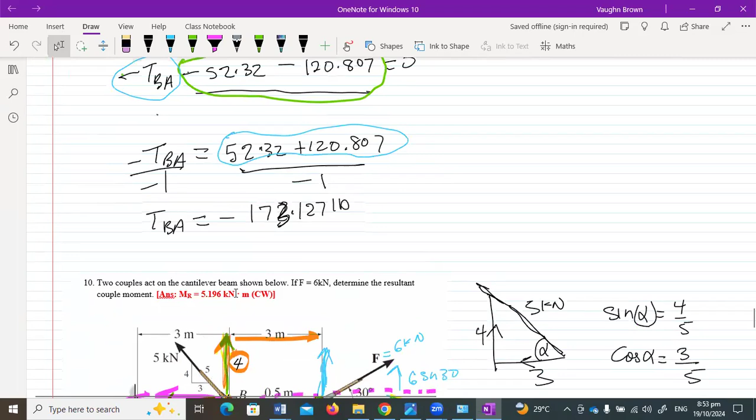All right, and right, so that's what it gives. Yeah, that's what the problem shows. And that is clockwise. Well, it depends on if you use the convention. If you use anti-clockwise, you're getting it as minus. If you use clockwise, then you get it as positive. I think when this working out was done, they did it for the positive direction. We used a negative direction, so we're going to get the answer minus. That's the only difference there.

All right, where are we? We're back up here. We should still put the 6. Pardon me? Oh, it's supposed to be negative 5.196. I don't get you. It's supposed to be negative 5.196. 5.16, you said? Yes, sir. It means that we have 5.19.

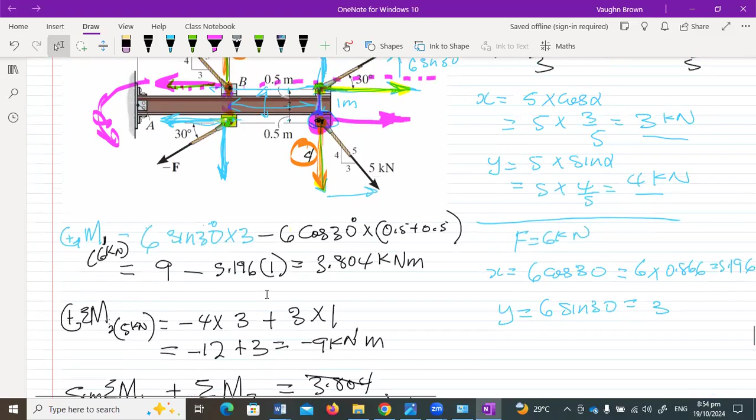Along our way, we probably are not using enough decimal points. It's in the answer, 5.196. How much did we get? Yeah, so it's supposed to be 6 when you work it out. That's why I got negative 5.196. Negative 5.1 means that they used more decimal points than what we used. Sir, use the value that you're actually presenting right now. Well, you can recheck it and put in some more decimal points, and you will get it down to that.

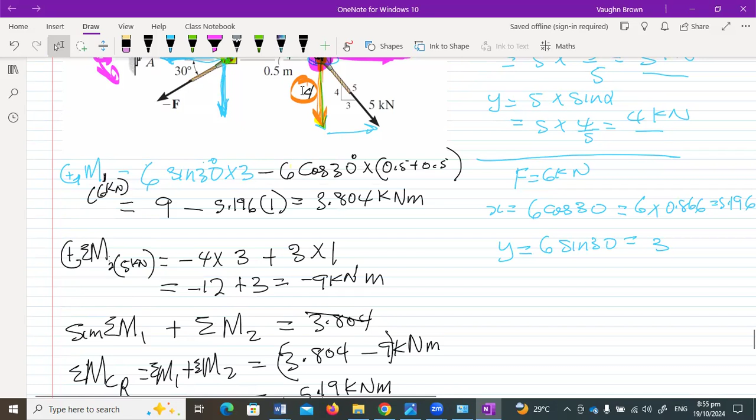So this 9 flat, I think that is okay. The answer is probably right here. So you had 9. Yeah, well, we're not going to worry about that. You just work it out to the lowest figure. All right. So the principle is what you want to understand. All right, what else? The question, let me see. So that question, that's what was asked.

So the answer is really 5.2. When they were working the answer, and this is from the text, I think they used certain decimal points down to certain factors. So like when you find the cosine value, and you have it as 0.866, they would have used probably another digit down, and that would give you the answer. That's the difference.